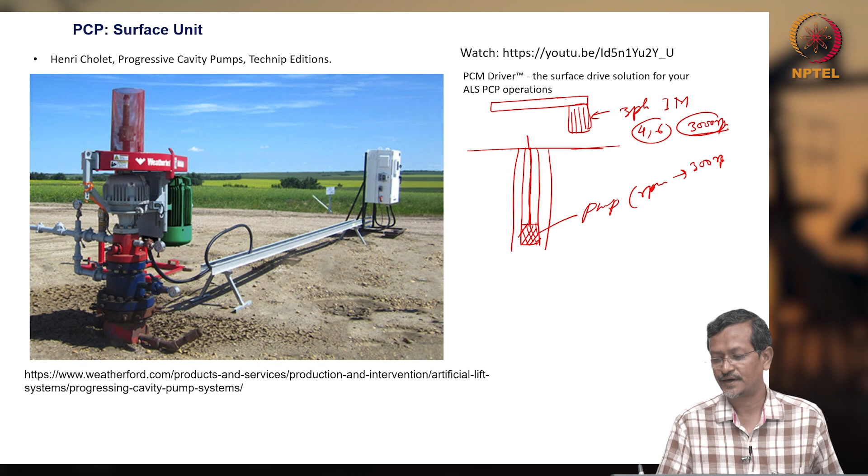It's about 300 to 500 rpm, but sometimes it will be 100 rpm also, based on your wellbore criteria. For example, if very thick fluid is there, you can run at very slow speed, that is okay, but thin fluid normally you have to run at higher speed.

Now the sucker rod is coming here, and this section will have your polish rod. The polish rod will be like this, and then there will be one stuffing box. Then from the stuffing box, the polish rod is connected to your

main sucker rod. When you are reducing speed, there will be maybe a belt drive, sometimes a gear drive also connected to reduce the speed. So you are not connecting your motor directly to your sucker rod because of the speed issue, you have to reduce the speed. I have done a basic discussion on belt drive in our sucker rod pumping system video, where I discussed belt drive and gear drive, so please go through that portion of sucker rod pump.

Now this polish rod and stuffing box is similar to the sucker rod pump stuffing box, like the seal section. Stuffing box means seal section. So whatever wellbore fluid you are getting should not cross the seal section, rather it will go through your line, meaning it will go to your separator system. So this wellbore fluid, if it crosses the stuffing box, there will be leakage, in this way.

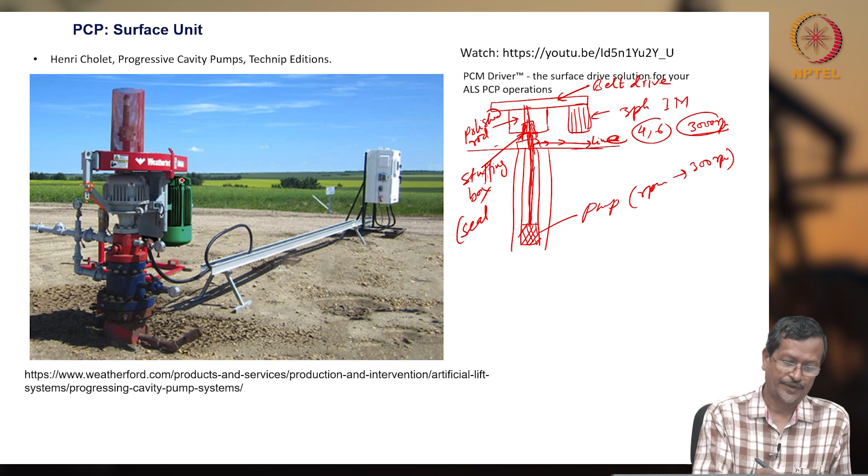And on the left side picture I have shown, you can see this one I have taken from a Weatherford catalog, and the link is given below. Here you can see the motor, and there is a drive system, belt, normally belt will be there. Then there will be a stuffing box, and inside there will be a polish rod, which you cannot see here.

And then a T junction is here, so your fluid goes to the separator. And your sucker rod, that polish rod, is moving directly into your wellbore. There will be a sucker rod, which you cannot see here actually.

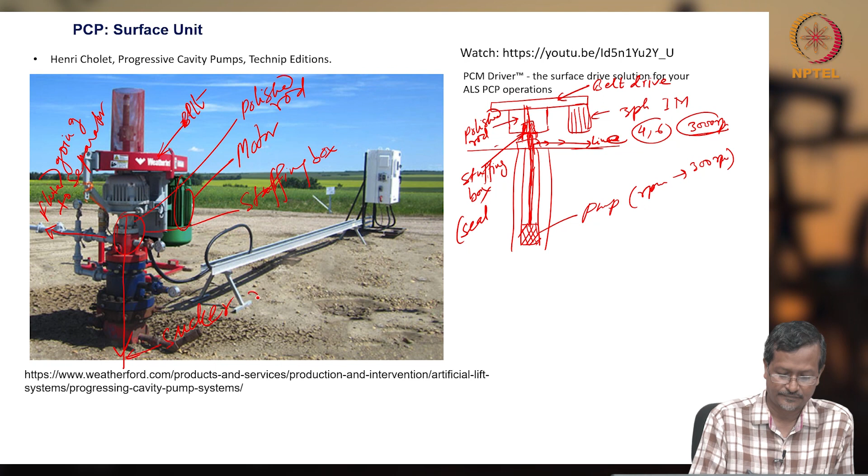Sucker rod I already discussed. The sucker rod basically gets torque, but in SRP the sucker rod gets tensile strength, tensile stress, or tensile load.

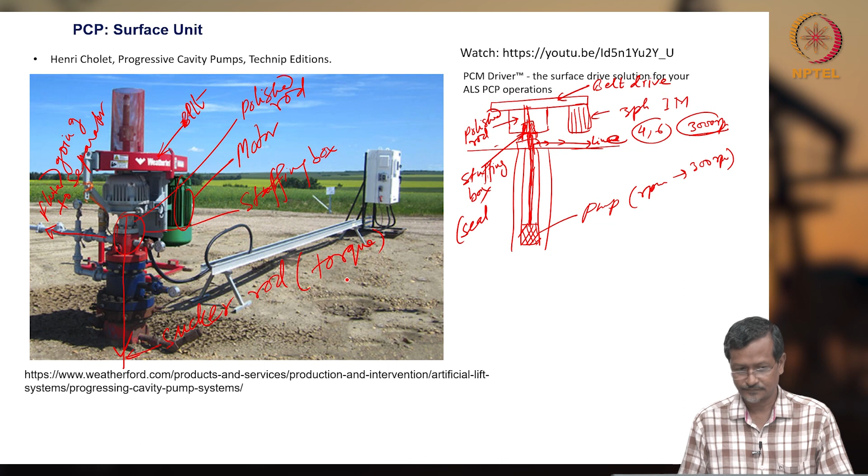Now let's go to the next slide. So the surface unit has one variable speed drive, or VSD, or variable frequency drive, or VFD. If you have VFD, then it is actually an AC drive and you can use it directly with your induction motor. But if you have VSD, then you can connect it to AC or DC motor.

So normally we are using a 3-phase AC induction motor, so we can use any VFD or VSD, and this will be part of the surface system, so that you can have more control over your pumping speed. So if you want to change 300 to 250 rpm or 300 to 350 rpm of your pump, you cannot change your belt drive or gear system directly, because those mechanical systems would need to be replaced.

Rather, you have one VFD or VSD control unit. There you change your frequency or parameter, then automatically the frequency will change, so automatically the speed will be changed. So instead of a mechanical change in speed, you can change the pump speed using VFD or VSD.

So this will be connected to your motor. The VFD or VSD will be connected to the motor, and the motor power will go to your belt drive.

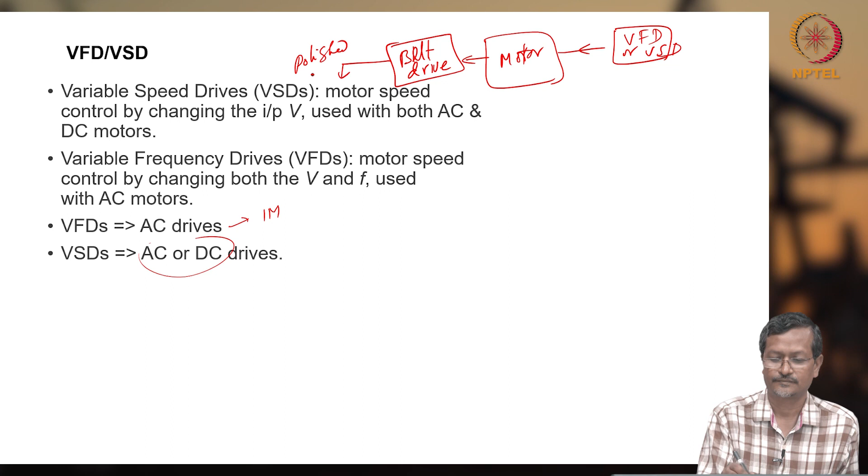So that power will go to your polish rod. Then one pony rod will be there, so from pony rod to sucker rod to pump. You see the sequence of power transmission. Variable frequency drive will be connected to main transformer, it's transformer to VFD to motor to belt drive or drive system, then polish rod, pony rod to sucker rod, polish rod, sucker rod to pump. Finally, you are delivering fluid, and pump is basically positive displacement pump.

So very high viscosity fluid can be pumped using progressive cavity pump. This is PCP or progressive cavity pump.

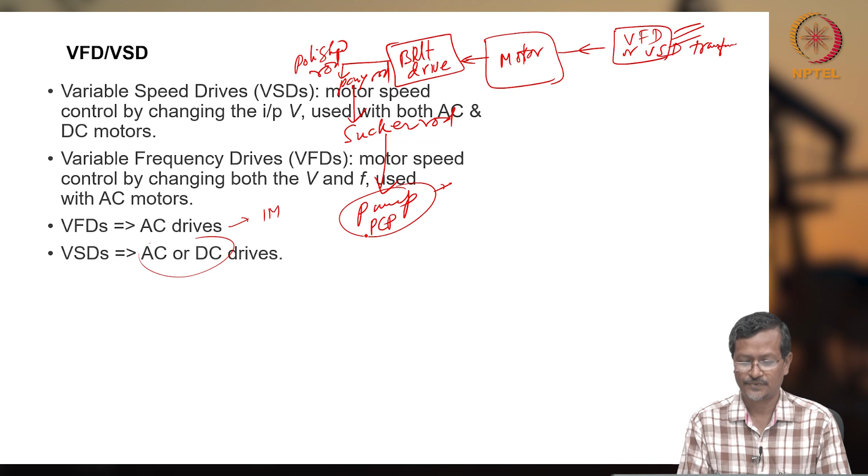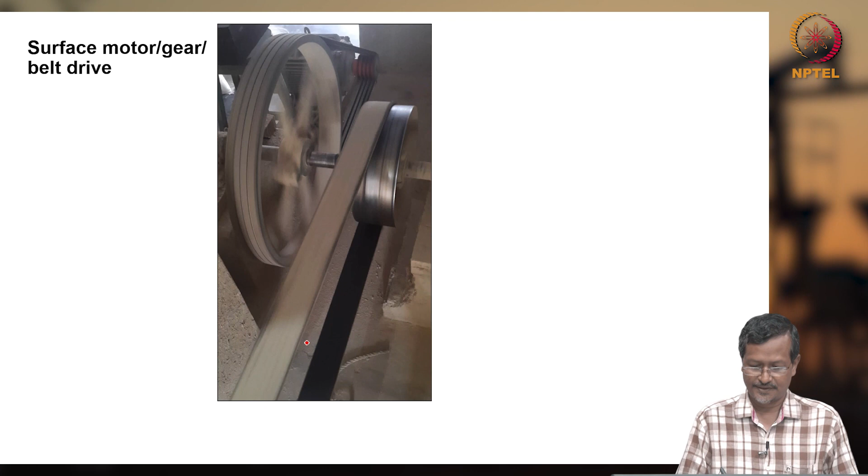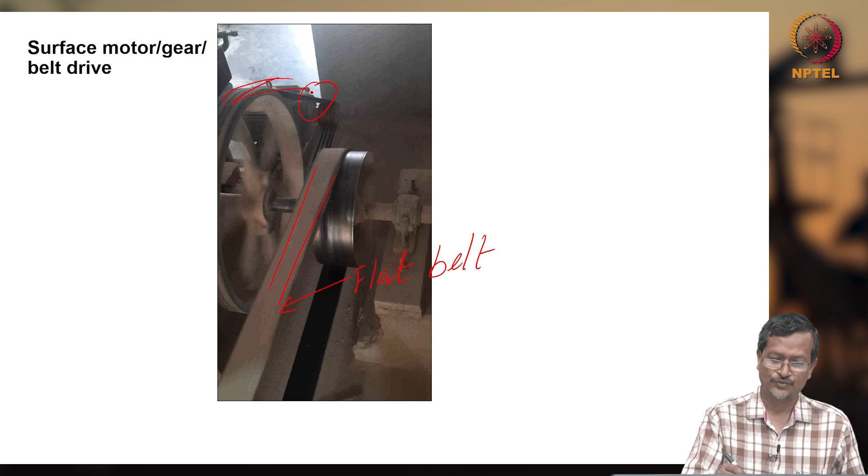Now I said like belt drive. This picture I have taken from one of my friends who is having some husking mill, so they have belt drive. I took this picture. I hope it will run. Yeah, you can see this belt drive. This is the belt drive, and this is flat belt drive, this one flat belt. This is flat belt drive, and this one is having V belt drive.

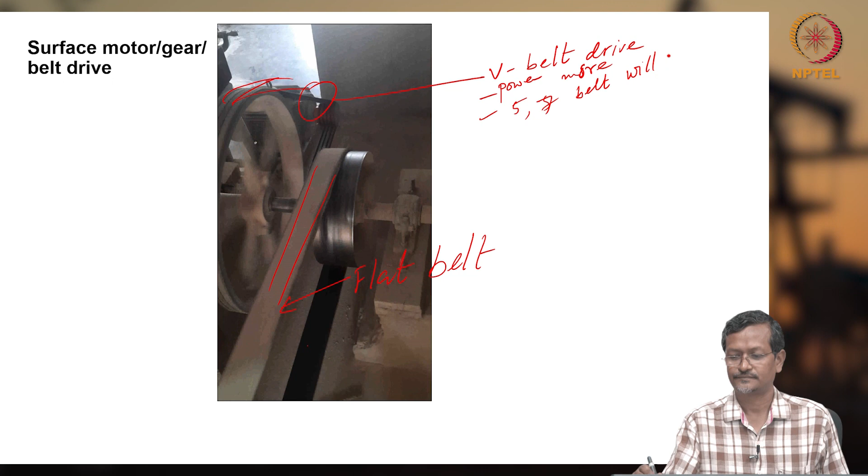What is the difference between V belt drive and flat belt drive? V belt drive can transfer more power. Several V belts will be connected, like 5 or 7 belts will be connected, will be there, and this is called sheave.

So there is a sheave, or 2 pulleys, sometimes we say pulley. So this is sheave, this is belt, this is sheave. Just I am drawing sheave.

So here what is the purpose? There is a motor actually. This small pulley is connected to motor. Big pulley is connected to your sucker rod. Why is big pulley connected to sucker rod? Because you are reducing speed.

So small, let's say diameter ratio D to small d, so D by small d, so your speed also will be changing the same way. Big speed n, small speed n, then it will be just opposite, small speed will be higher. This way you are changing your speed. If 2 times, then if big wheel diameter or big sheave diameter, let's say 1 meter, small is 10 centimeters, so 10 times speed will be changed. So speed reduction will be 10 times.

So if it is 3000 rpm motor, then your sucker rod speed will be 300 if D by d equals 10. If your diameter ratio is changed to 1/10, it's 10 times, then your speed will be reduced to 1/10. Similarly, if you have gear drive also, your speed will be changing the same way.

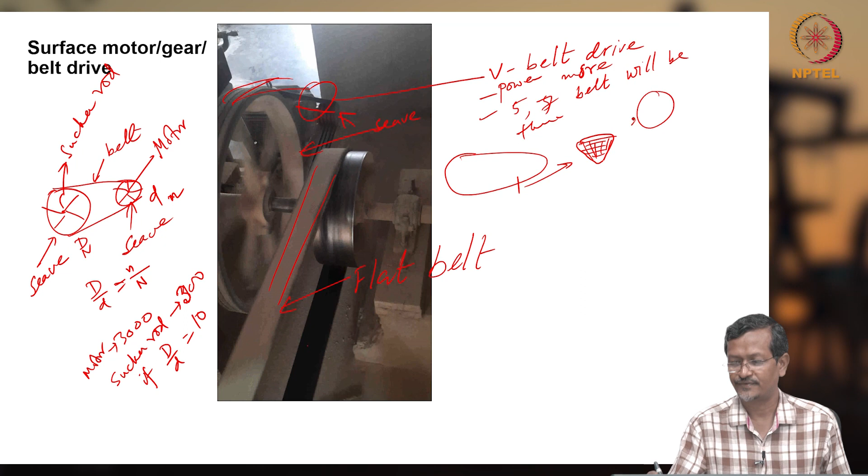If you see one belt is like this, and if I take one cross section it will be looking like this. Several layers of cotton and rubber will be there. And your pulley is like this. If I take cross sections from the side, let's say this is my pulley, this will have a groove, V type groove will be there. So pulley from side, if I see, it will look like this. From top, bottom also will be looking like this.

And belt will be put here, the belt will be here. So the belt and groove, these are called groove. The groove on the pulley will be such a way that the belt will be fixed properly, so that it will have more surface contact.

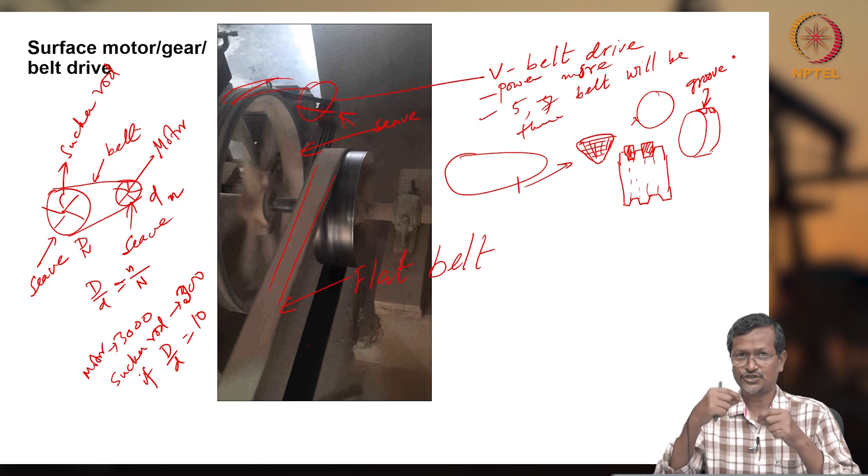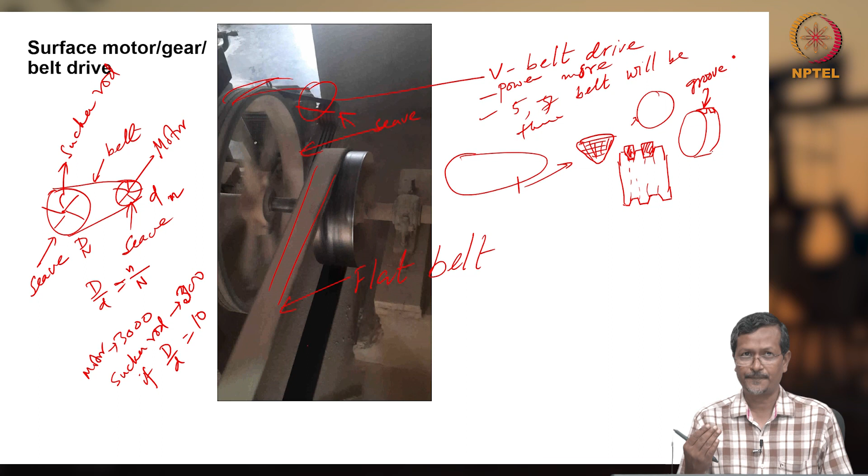If more surface contact is there, that means more friction is there, meaning whenever high power is getting transferred, because of friction, the smaller wheel will be turning the bigger wheel without sliding. If that contact is not there, that surface area contact is small, then it will be sliding.

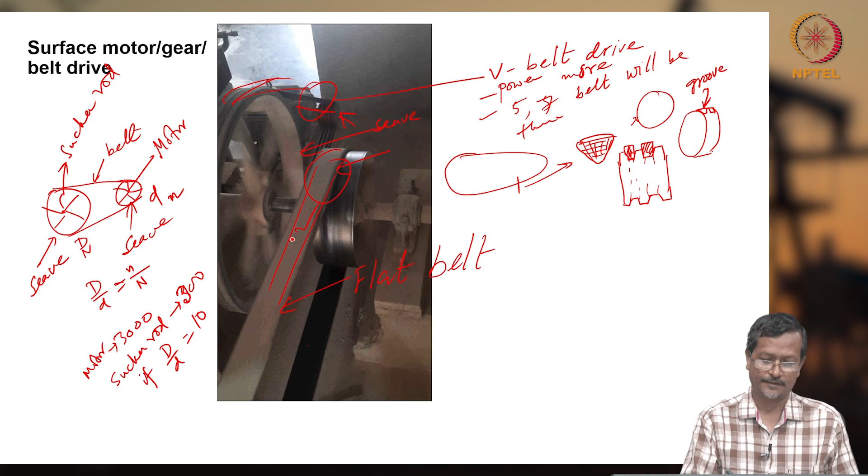So flat belt, if you see the flat belt, this is flat belt. This flat belt will have less surface contact area, so its power carrying capacity will be low. So in very high power transmission cases, we do not use flat belt, we use V belt, so that will have more surface contact. Like if you see this picture I am drawing, this is the whole contact area for V belt. And if you have more tension, this belt will be gripping properly on the grooves of the sheaves or pulleys, that way it will be transferring more power.

So on your PCP surface drive also you are using V belt. Even your sucker rod pump, you can remember SRP or beam pump, there also you are using V belt, transferring power from motor to your gearbox.

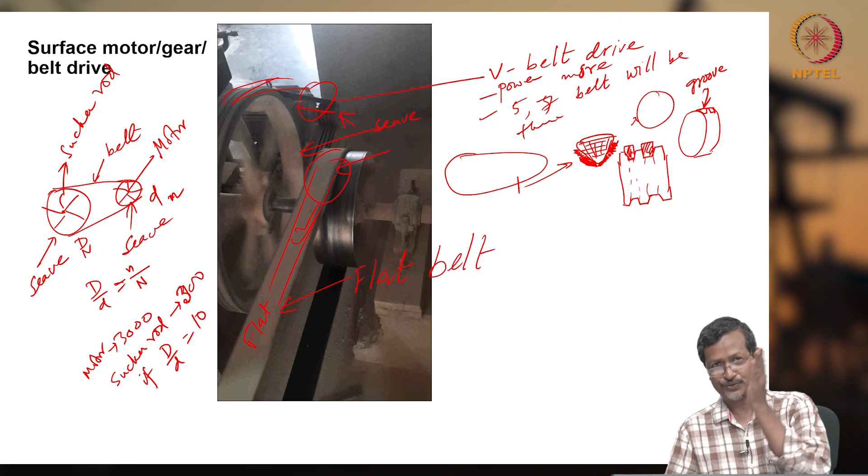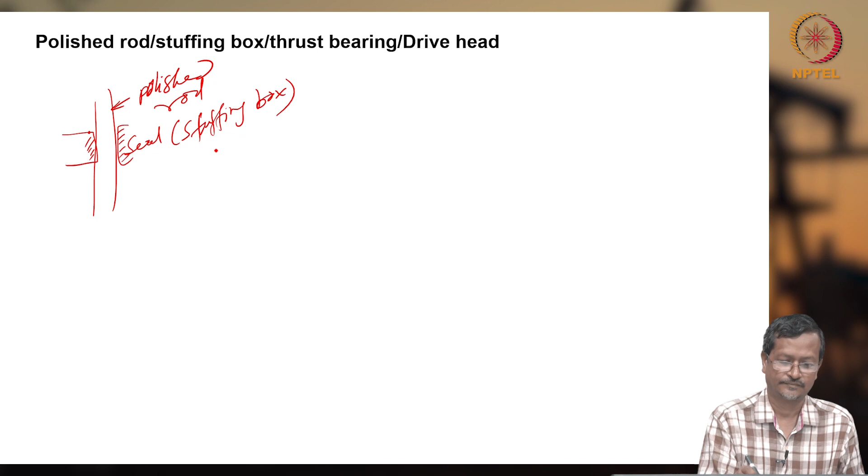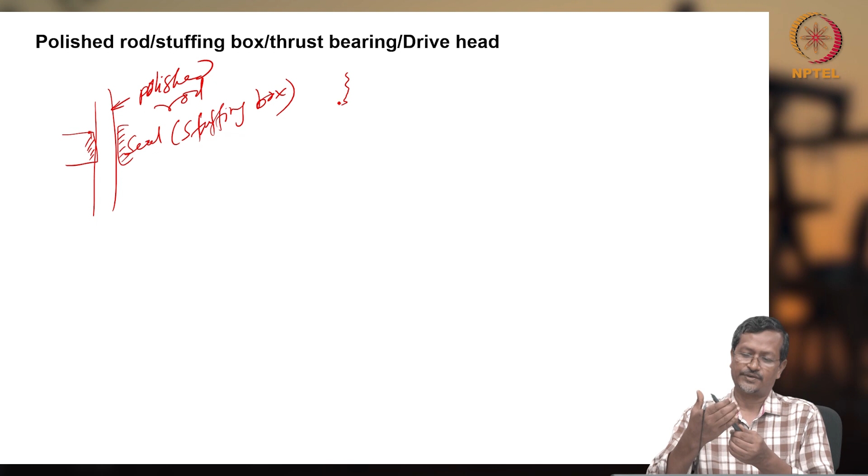Polish rod is similar to sucker rod pump, but in sucker rod pump one thing was there - it was reciprocating inside your seal section. Like the polish rod, and this is the seal. The polish rod must be sealed properly so that no fluid enters through this seal. This seal section is called the stuffing box. If you do not make the polish rod surface finish properly, the surface unevenness will tear away this seal surface, and after certain operation it will leak.

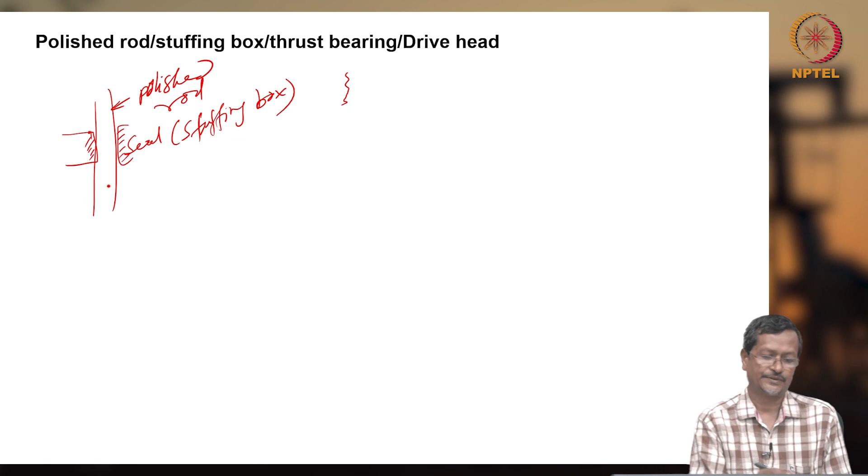In sucker rod pump, it was reciprocating, but in this case it will be rotating. So this is rotating for PCP, but reciprocating for SRP.

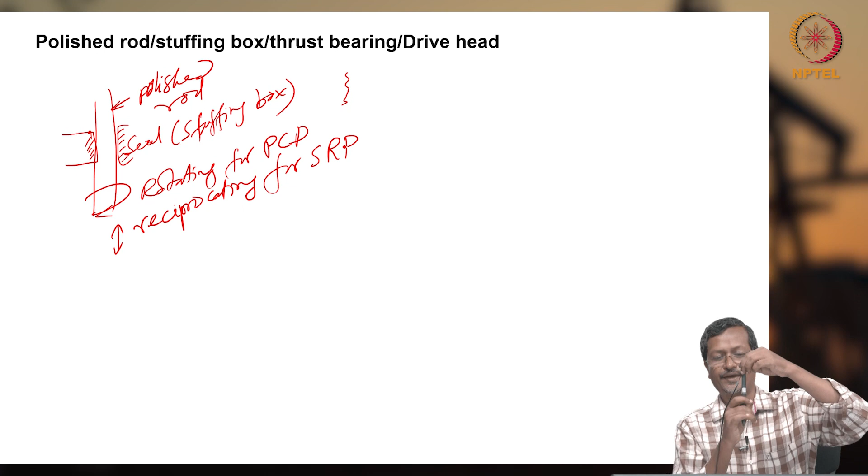Thrust bearing - why will it be required? Because you have a whole long sucker rod hanging from somewhere and rotating also. In sucker rod pump, we do not put any thrust bearing because the nodding donkey or horse head was pulling up and down, so there is no thrust bearing there. But in this case, your rod is not moving up and down, rather it is rotating. Because of rotating, you need one thrust bearing.

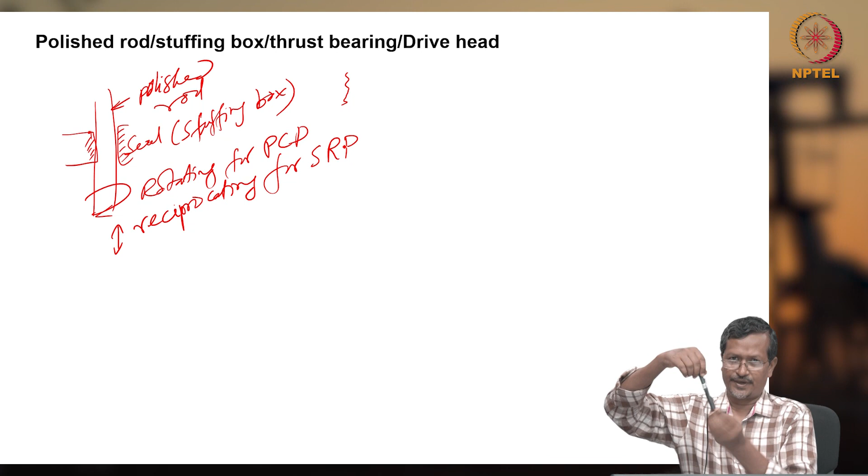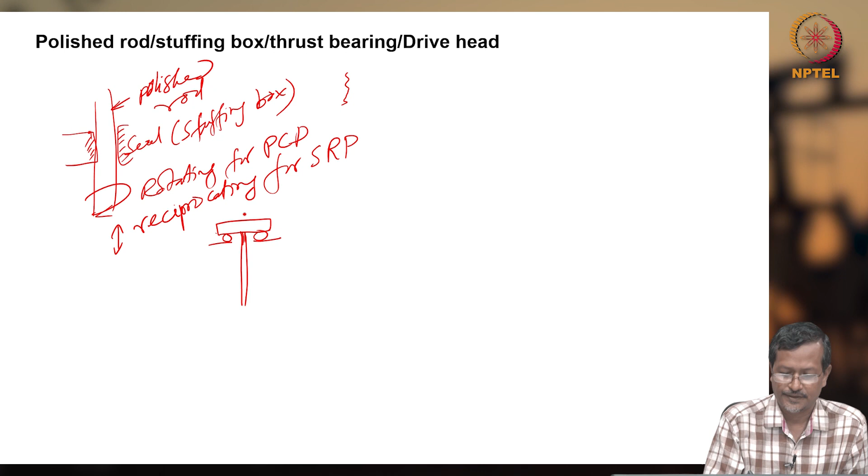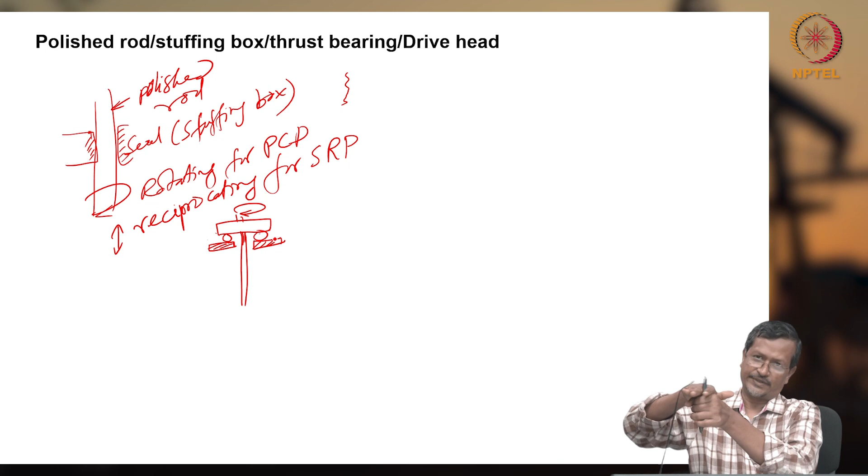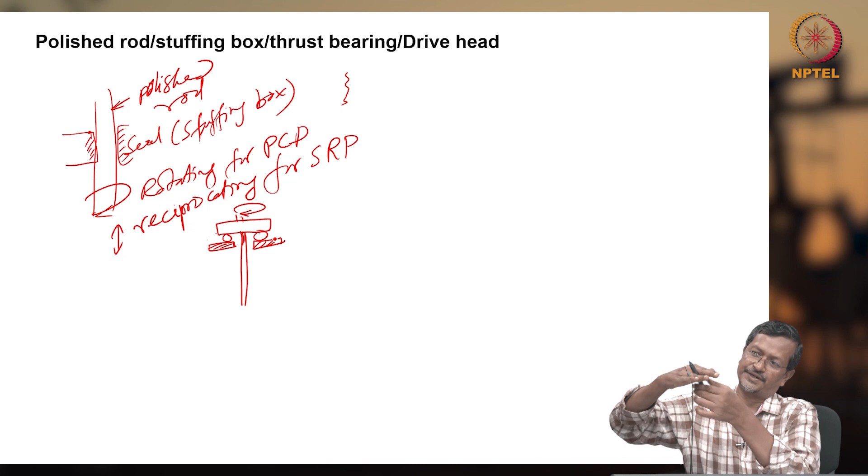How does the thrust bearing work? Let's say one bearing is this, and you give rotation to this. This is the bearing - two rollers are there, lots of balls are there, and this is my shaft rotating continuously. Because of load it will go down, so we don't allow it to go down. What we'll do is put lots of bearings and a flat plate here, with lots of balls in between. So balls are there, flat plate is there - the flat plate will be rotating smoothly over the balls and holding the load also. Although the shaft will be pulling down, the lower plate is fixed, so it rotates continuously and is not allowed to go down because there are lots of balls - there is no friction. This way you create a thrust bearing.

Thrust bearing takes load - which load? Axial load. So thrust bearing is not made for radial load, no radial load.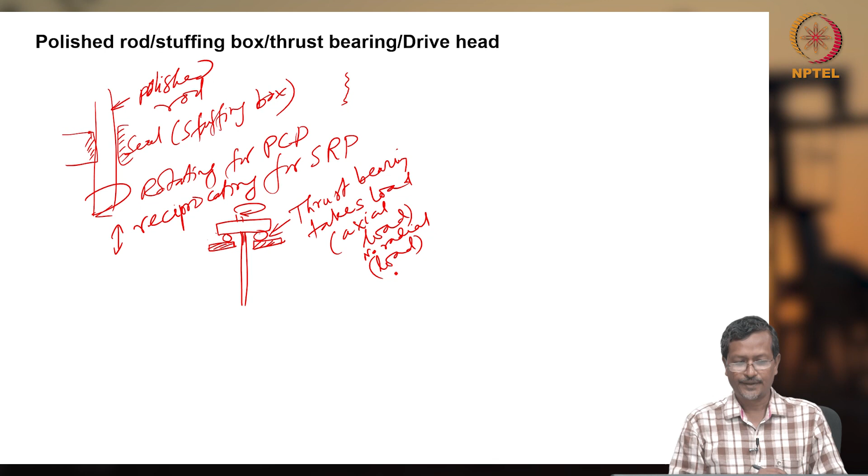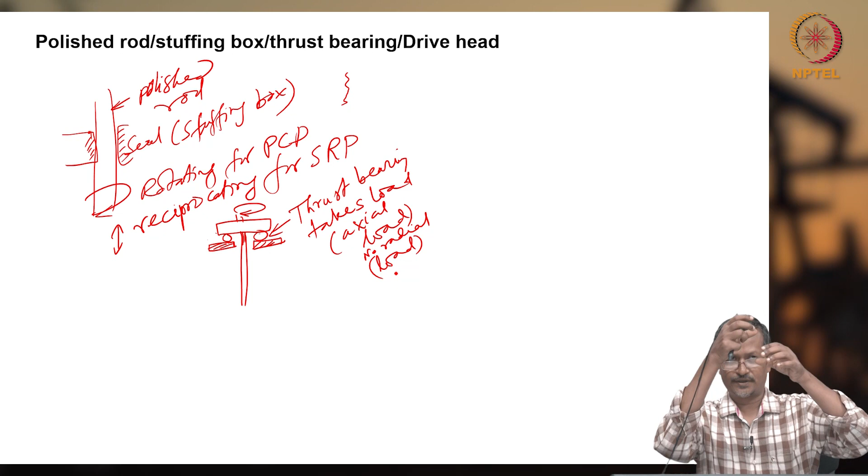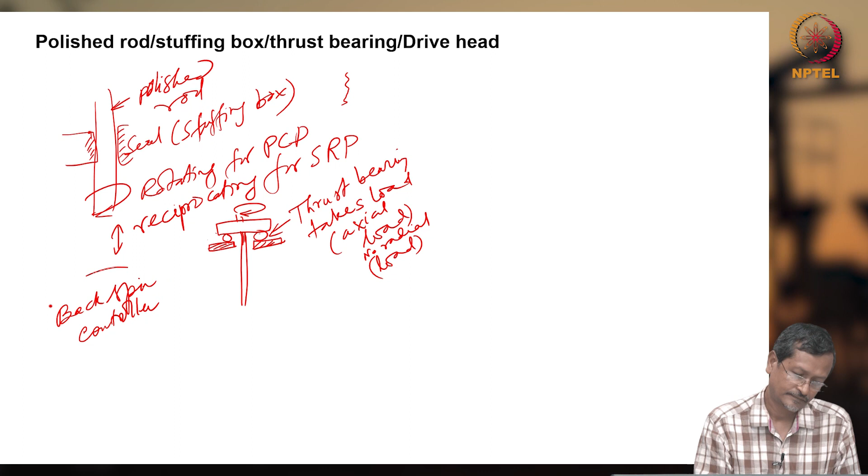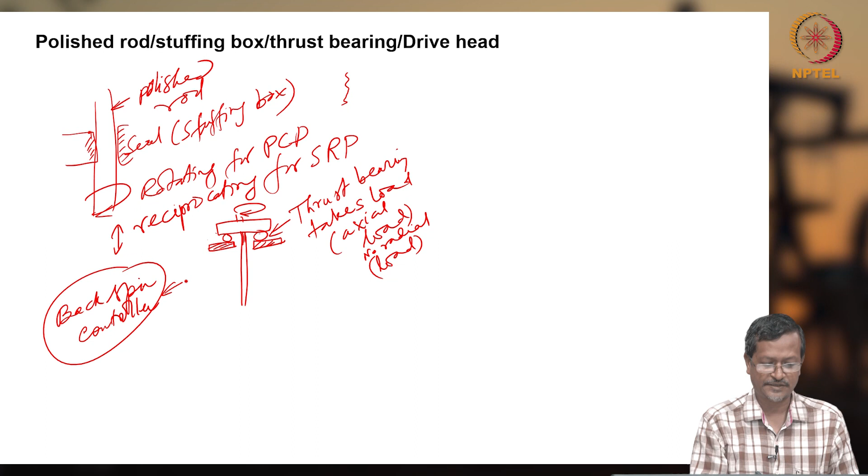The drive head will have all these things like motor, belt drive, gear mechanism so that you can reduce the speed. Then there will be one stuffing box, and one backspin controller also will be there. If for certain reason your motor stops working, your rotation gets stopped, the whole fluid column will be working on the pump, so the pump will try to rotate backwards, which can be disastrous sometime. So you should have one braking system or backspin controller system to stop the pump - that is called the backspin controller.

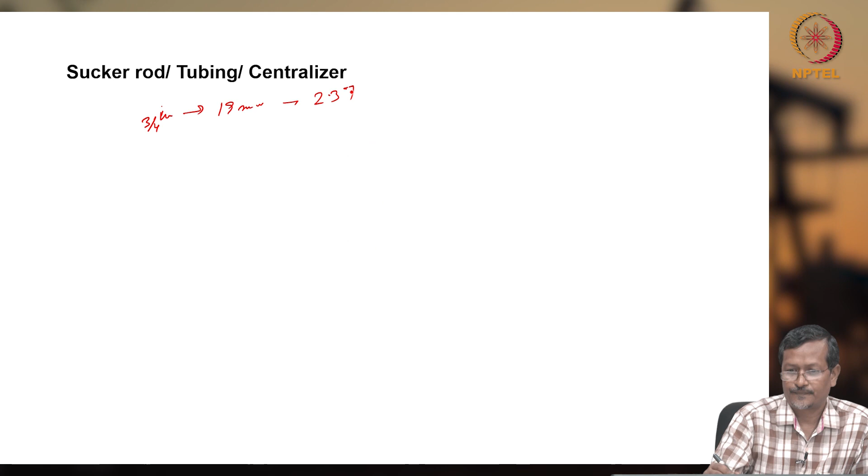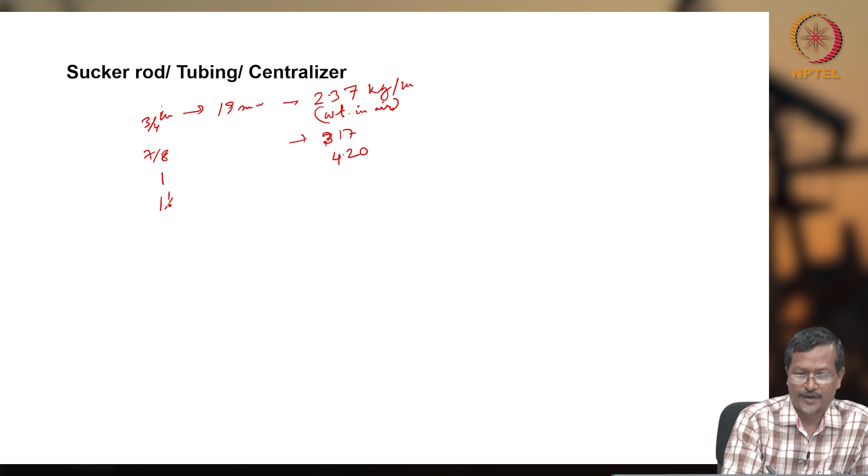Whenever we talk about sucker rods, we have their own table for sizing. Nominal diameter of sucker rod gives weight - to get weight of the sucker rod you have to get the nominal diameter. For example, 3/4 inch size sucker rod will have nominal diameter 19 millimeter and weight in air 2.37 kg per meter. If you have larger diameter, for example 7/8 inch, your weight will be 3.17. If you have 1 inch, your weight will be 4.20 kg per meter in air. If you have 1-1/8 inch, your weight will be 5.36. So if you know your rod size, accordingly you can calculate how much weight will be on your thrust bearing.

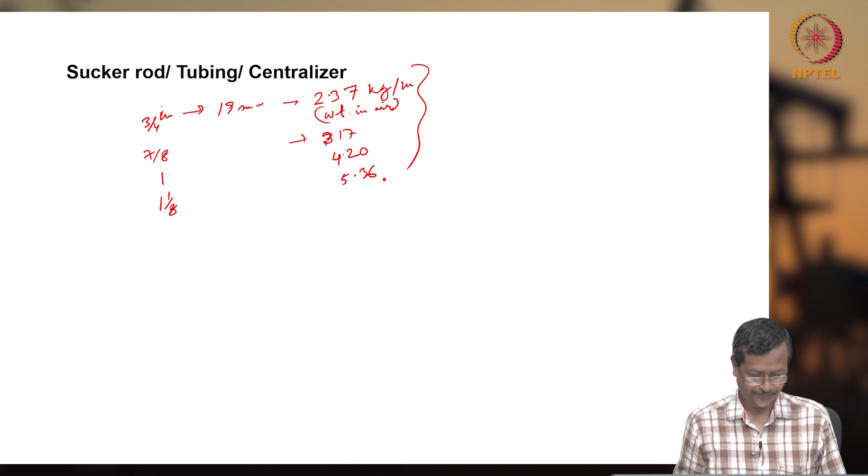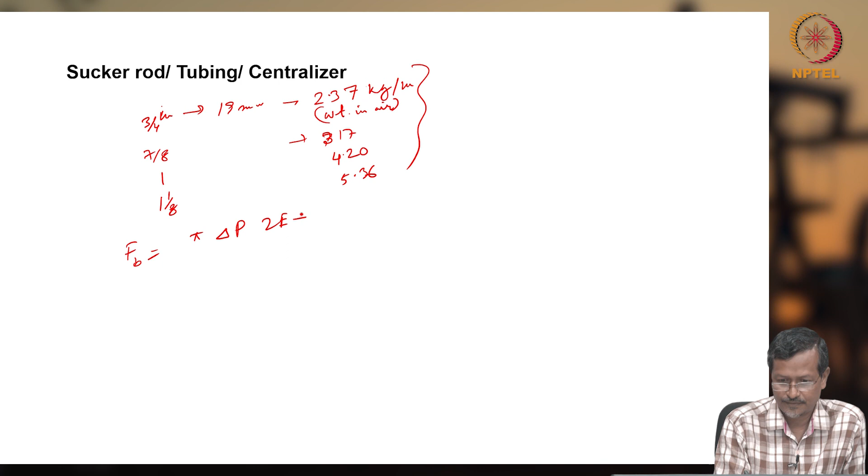So thrust generated by the rotating pump - the formula I already gave you: pi times delta p, 2e plus d whole square divided by 4. This is the formula I gave already in the last lecture.

Total stress on the driving system: F equals FP plus FB, axial. Total stress is coming because of fluid load and its own weight - this is own weight, this is fluid load, and because of that you are getting stress.

Stress equals 0.4 divided by pi d cube, times square root of F square d square plus 64 tau square, into 10 power 6. This is stress in MPa - total stress. D is the diameter of the driving string or sucker rod. Tau is the resistance torque.

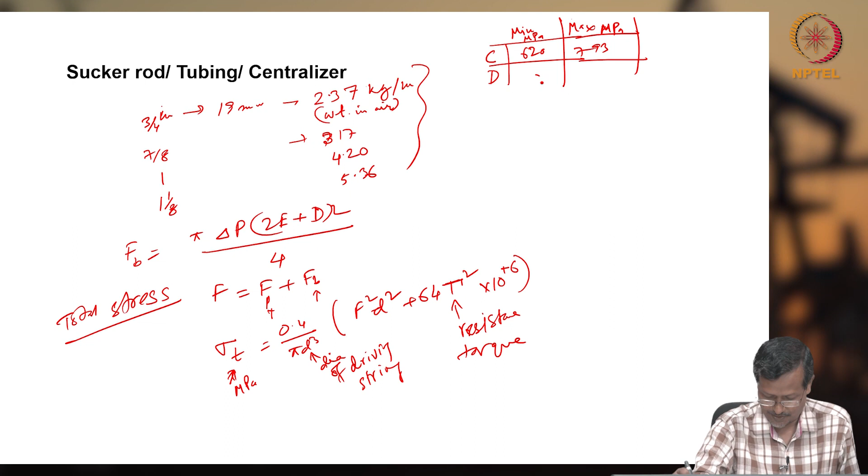Sigma t in MPa. Now there are two types of rod grade, C type and D type. In the API table you can find the C type grade with minimum and maximum load values in MPa. Minimum is 620 MPa and maximum is 793 MPa, and for another range maximum is 965.

So tubing, because sucker rod is a long rod, and when it is moving through the tubing, there is a possibility that the rod can be bent or there will be some slantness. In that case you have to put some centralizer.

Centralizer is a mechanical equipment arranged in such a way that it allows rotation but does not allow the rod to touch the tubing. It is all around, so that whenever it is rotating, it rotates centralized inside the tubing. That's why it is called centralizer.

If a vertical well is there, only 4-5 centralizers will be okay. But if a crooked wellbore is there, you have to put several centralizers. Otherwise, the sucker rod string will be touching the tubing, and when it touches the tubing it will get constantly eroded because of the rotation. There will be friction, the tubing can be leaked or the sucker rod can fail. It can even reduce vibration.

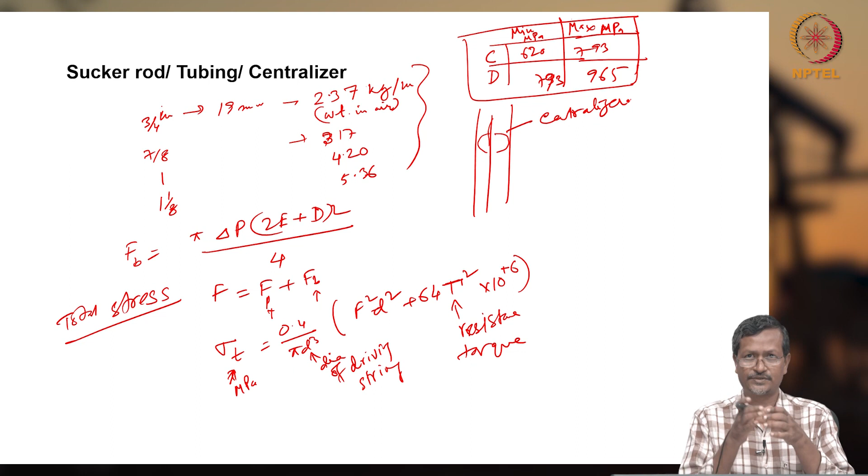Another function of the centralizer: on the tubing outside also you can put a centralizer, so that when the tubing is bending it should not touch the casing. The centralizer centralizes the system so vibration can be avoided and it will not touch the tubing or create any rubbing action, so that the life can be extended.

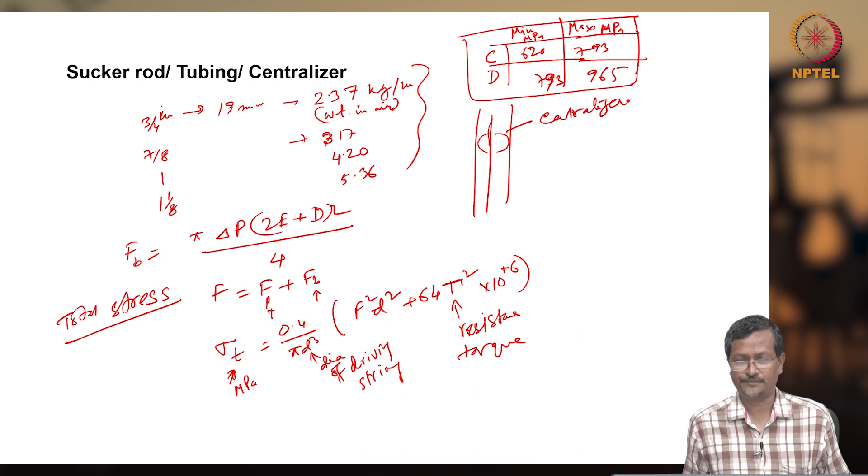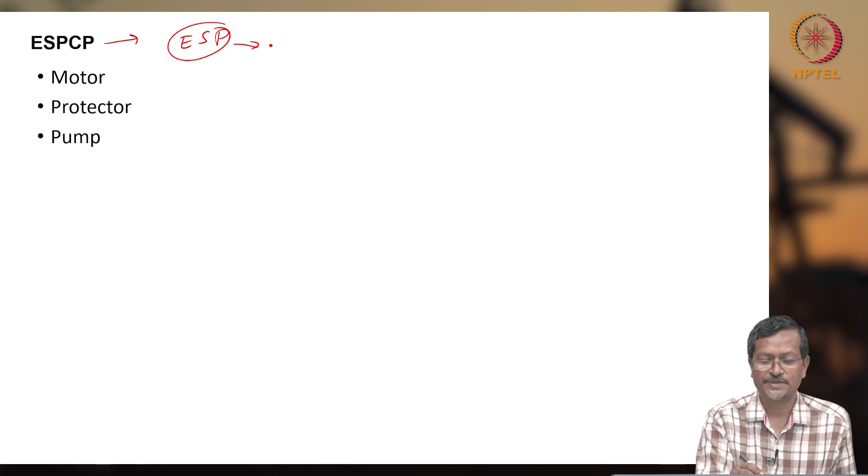ESP-CP, we discussed already. ESP you can remember from other lectures; please see the lectures, several lectures will be there on ESP. So electric submersible pump, in this case we use a centrifugal pump.

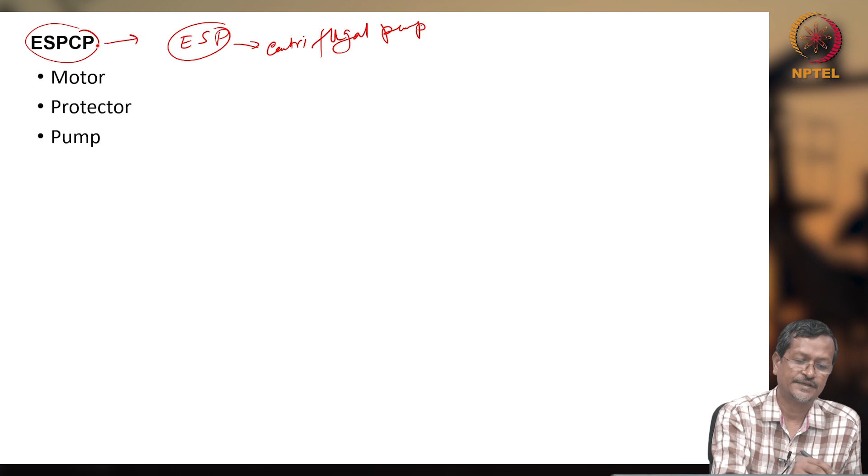But whenever you are talking about ESP-CP, we use PCP - ES plus PCP, electric submersible - because the ESP term is already taken by the centrifugal pump, so we cannot use the same term for PCP. So the designers put ESPCP, electric submersible PCP.

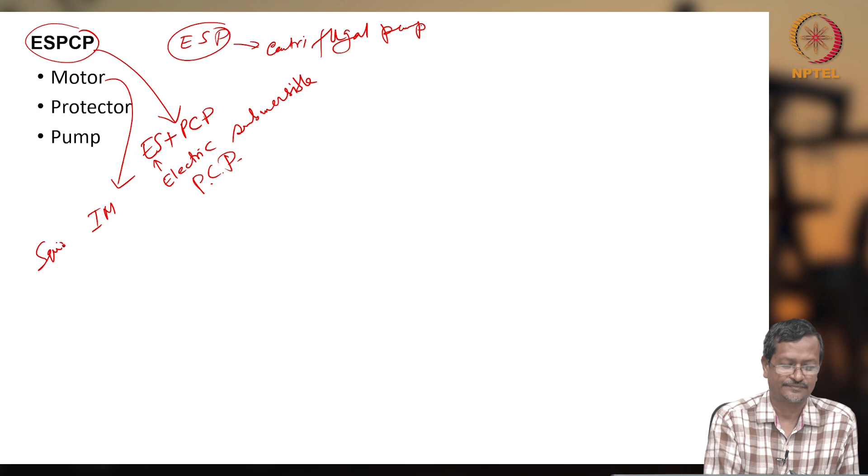As in ESP, you will have one motor, an induction motor, squirrel cage induction motor. There will be one protector. The electric cable is coming here, motor is here, protector must be there, then there will be the pump. Your cable is coming directly to the motor. The motor gives shaft power and the shaft passes through your protector, then the intake section, then to your pump section.

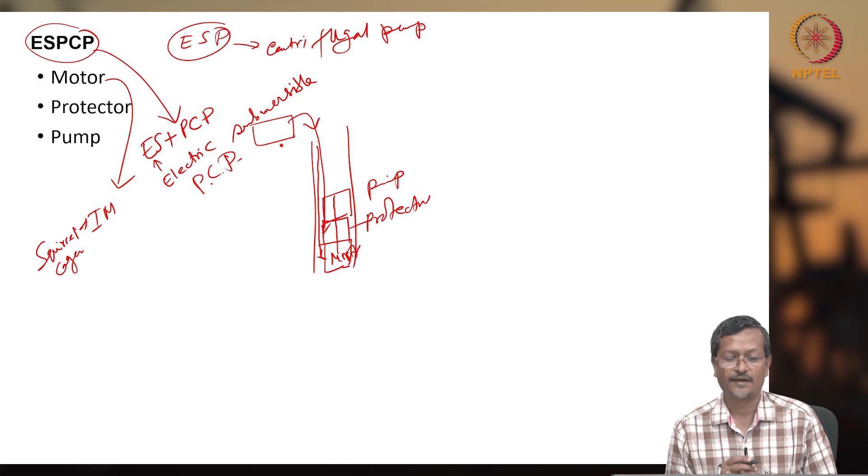In the similar way, instead of a centrifugal pump you are putting a PCP, a multi-stage PCP. As I already told, one rotor and one stator with one pitch length is one stage, so multiple stages mean multiple pitch lengths. It will also be several meters long, a progressive cavity pump to deliver viscous fluid or high viscosity heavy oil. The surface unit also will be the same: gas venting, VFD system, controlling system - all the systems are the same, only the pump inside is different.

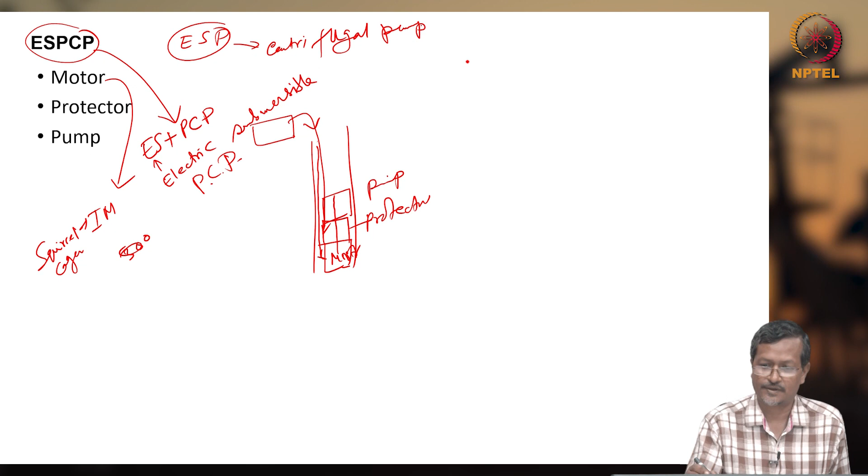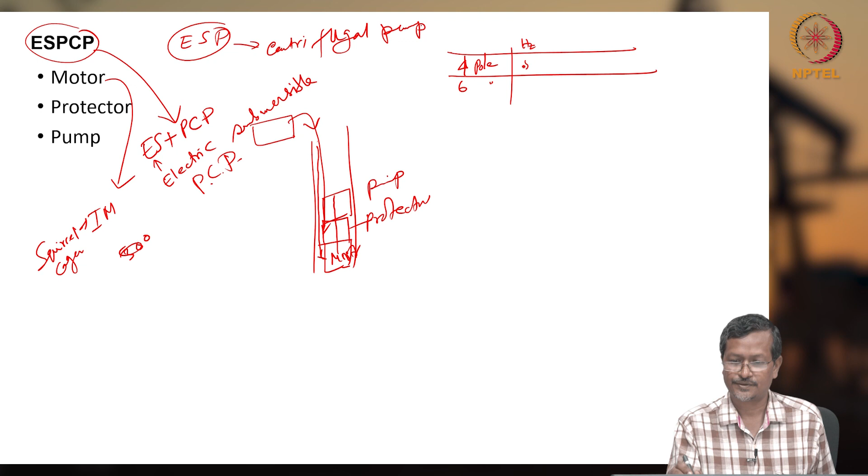One more thing: if the motor speed is higher, you have to use a gear drive to reduce the speed. Normally for this induction motor you use 4 pole or 6 pole. So when you are using 4 pole or 6 pole, your speed will be different at 50 hertz. Let me write: 4 pole, 6 pole, at hertz 50 hertz, then speed is 300, and this is 200.

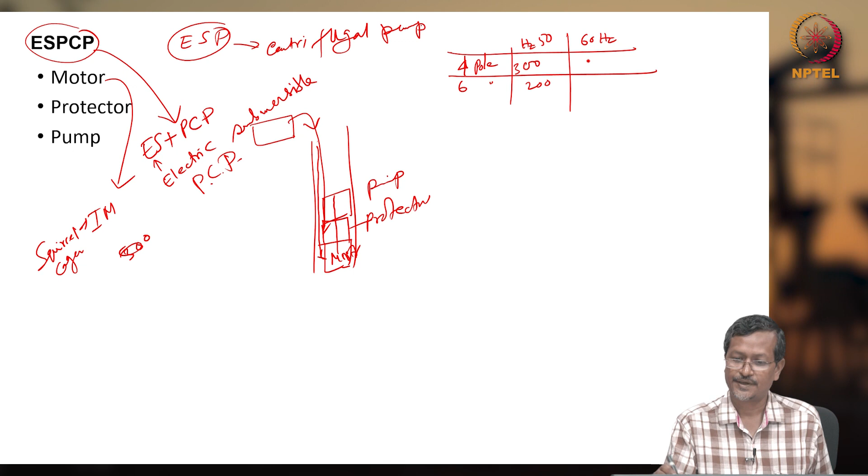At 60 hertz, speed will be 360 and 240, and the motor is producing higher speed, but in between the motor and your pump there is one gearbox system. The gear ratio, normally 1:5 or 1:10, reduces the speed. That's why finally you are getting this much speed using the motor.